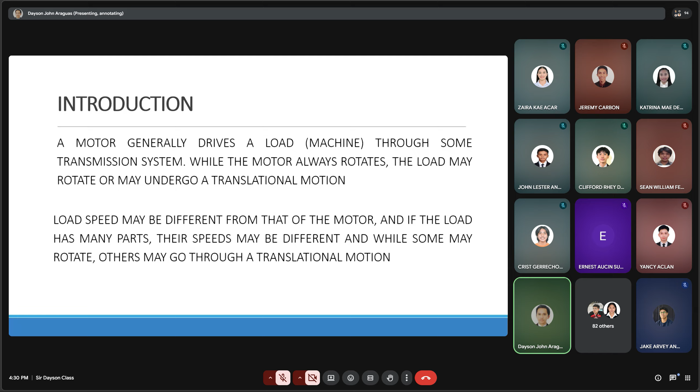Okay. Again, some loads rotate like fans or pumps, while some loads move in straight line like elevators and conveyors. So because of this, the speed of the motor and the speed of the load may be different. So hindi laging equal yung speed ng sa motor shaft at yung sa speed ng sa load.

So this is the representation of the motor load system by an equivalent rotational system. Okay. So we have a motor here, and we have torque of the motor, in clockwise. Also, we have instantaneous angular velocity of the motor shaft, clockwise also. So torque of the motor is clockwise, angular velocity is clockwise, and then for the torque of the load, usually opposite of the torque of the motor, which is counterclockwise.

So J is our polar moment of inertia of the motor load system. So the unit, you can just refer to the unit written in our material.

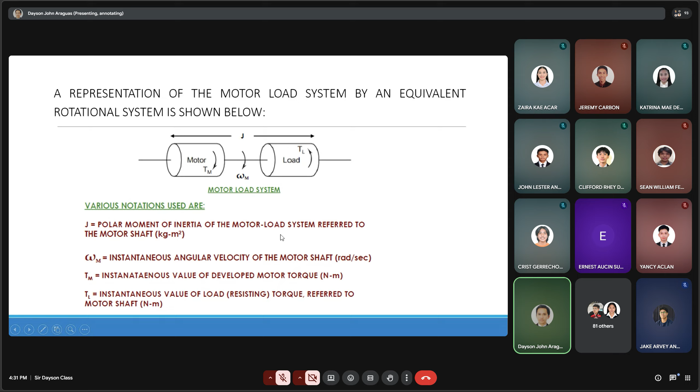So for the fundamental torque equations, the motor load system shown in the figure can be described by torque of the motor minus torque of the load, which is equal to the derivative of J times omega over time, or rate of change over time. Okay, which is also equal to J times d omega m over dt plus omega m times the derivative of J over time.

Okay. The equation above is applicable to variable inertia drives such as industrial robots. So for drives with constant inertia, dJ over dt is equal to 0. So usually, yung drives natin ay may constant inertia. So wala tayong rate of change with respect to inertia. So equal siya sa 0. So makakancel out yung ating part na to.

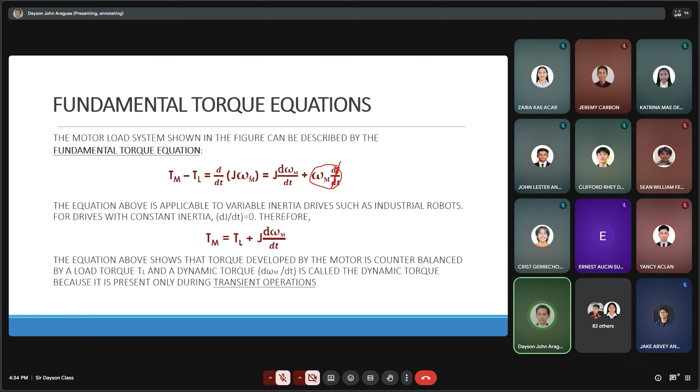So again, Tm is the motor torque. So this is the torque produced by the motor. TL is the torque load. So this is the torque required by the machine or the load. And J is the moment of inertia. So yung moment of inertia is siya nagre-represent how heavy or difficult it is to rotate the system. And omega m is the angular velocity of the motor shaft. So madalas tinatawag na lang din siyang speed. Ano?

So drive accelerates or decelerates depending whether the torque of the motor is greater than torque of the load. So during the acceleration, motor should supply not only the load torque but an additional torque component in order to overcome the drive inertia. In drives with large inertia, motor torque must exceed the load torque by a large amount in order to get adequate acceleration.

So if your motor torque is equal to your load torque, yes, you can maintain the drive system running. So pwedeng tumatakbo yung iyong system kung equal yung TM at saka TL. But from rest, pag equal yung torque ng motor at torque ng load, hindi mo mapapatakbo yung system or you cannot run the system when TM is equals to TL because of the inertia.

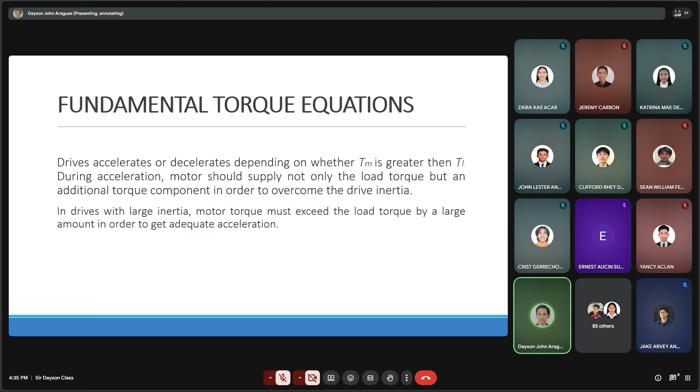So it is possible to determine the different state at which an electric drive causing rotational motion can remain. So the first state is if Tm is greater than TL, in which derivative of omega m over dt is greater than 0, so the drive will be accelerating. So again, pag mas mataas yung Tm sa TL, yung drive ninyo is accelerating or nagraran siya. Ano? Picking up speed to reach the rated speed.

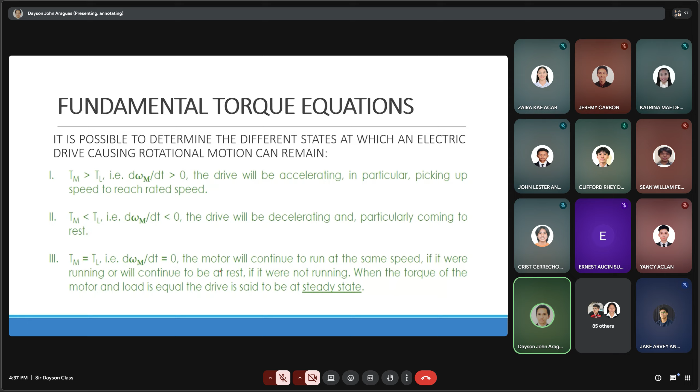So magme-maintain lang siya ng steady state. So kung tumatakbo, if it is running, and TM is equals to TL, it will continue to run at constant speed. But when it is at rest, it will continue to be at rest kahit pa may torque yung ating motor. So again, magme-maintain siya ng steady state.

So motor speed is considered positive when rotating in forward direction. So in loads involving up and down motion, the speed of motor which causes upward motion is considered forward motion. So for reversible drives, forward speed is chosen arbitrarily, then the rotation in opposite direction gives reverse speed which is assigned the negative sign. So arbitrary meaning the basis of random choice.

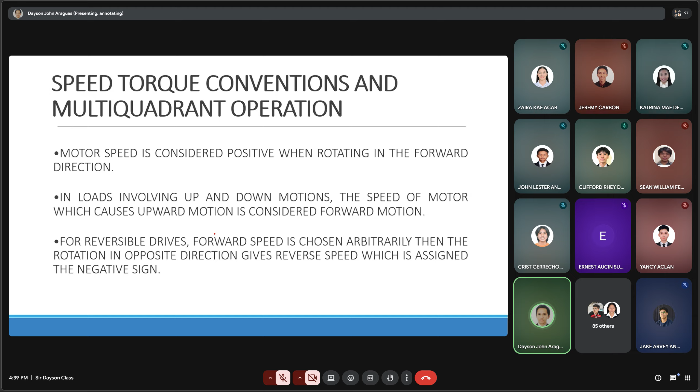So positive motor torque is defined as the torque which produces acceleration or positive rate of change of speed in forward direction. Positive load torque is opposite in direction to positive motor torque. Motor torque is considered negative if it produces deceleration. So positive load torque is opposite in direction to positive motor torque. This is from the figure that I have shown before.

Again, so the direction of the motor torque is always the opposite of the direction of the load torque.

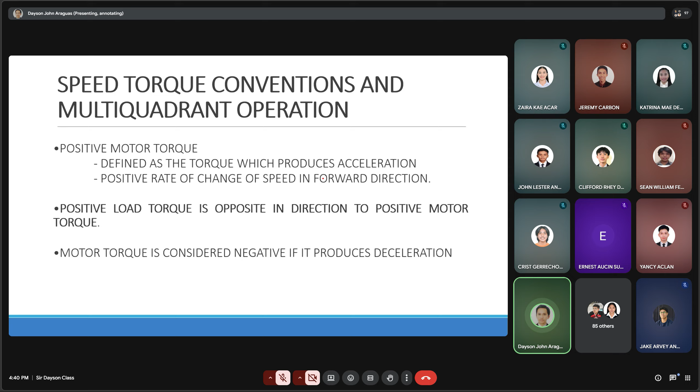So in electrical drives, forward rotation is considered positive and reverse rotation is considered negative. So in torque convention, positive motor torque produces acceleration in forward direction and negative motor torque produces deceleration. So usually load torque acts in the opposite direction of the motor torque.

So a motor operates in two modes: motoring, which converts electrical energy to mechanical energy, and braking, which works as a generator, converting mechanical energy to electrical energy. So it opposes the motion. So motoring supports the motion, braking opposes the motion. So a motor can provide motoring and braking operations for both forward and reverse action.

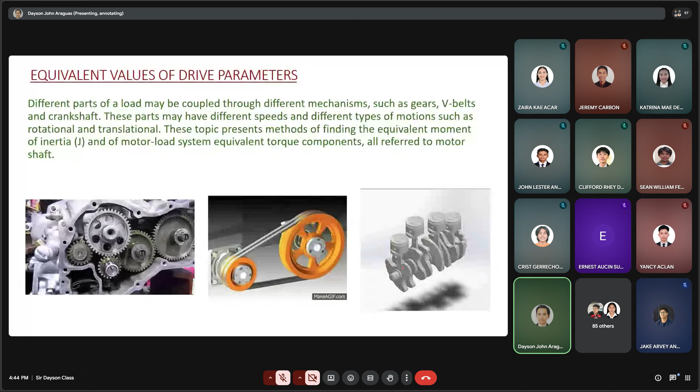Okay, let's focus first on load with rotational motion using gears. So consider a motor driving two loads, load 1 and load 2. So one is coupled directly to its shaft. So the motor has a shaft and the first load is directly connected to the motor shaft. And the other one through a gear.

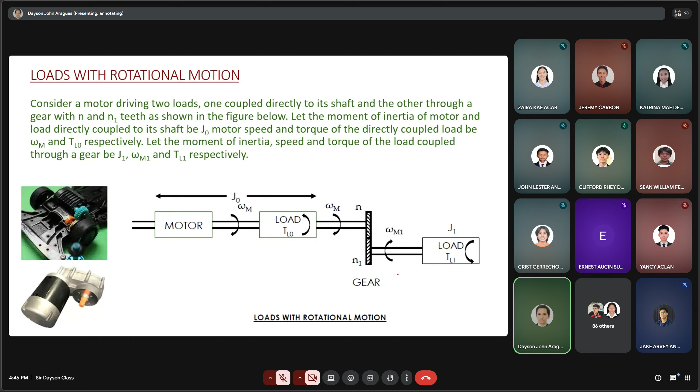Now let's consider that the ratio of our gear, or the gear teeth, is equal to A1, which is also equal to N divided by N1. So we will use this formula, which is also equivalent to omega M1 divided by omega M.

Wait, wait lang ha, may kumakausap lang sa akin. Wait lang.

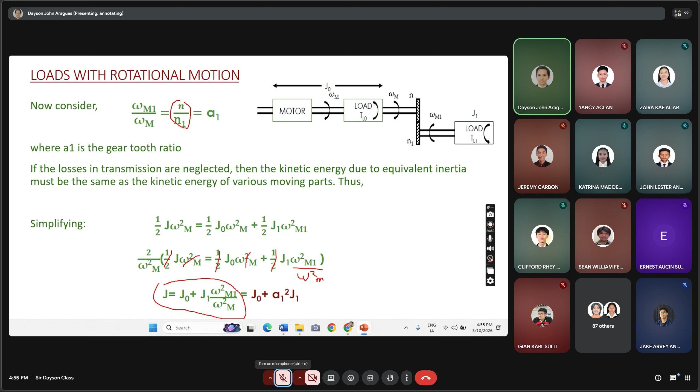Now, if you want to get the torque naman, we will first introduce the equation of power dito sa ating system. Okay, so power at the loads and motor must be the same. If transmission efficiency of the gear be eta, baka lang malito kayo, we have N and N1 para sa number of teeth. Pero yung eta, ganyan, mas mahaba siya. So eta hindi siya equal sa N. Eta is not equal to N. This is different. So if the transmission efficiency of the gear be eta, then ito yung ating gagamiting equation.

So torque load times omega m equals torque load naught times omega m plus torque ng load 1 times omega m1 over eta1. So bakit tayo may eta1? Because gumamit tayo ng gear, which is yung mechanical gear natin, meron siyang efficiency and hindi siya laging equal to 1 or hindi laging perfect yung efficiency pag gumagamit tayo ng gear. So nababawasan ang efficiency natin once connected na yung load natin through gears. Kaya meron tayong eta. So again, yung eta is yung efficiency ng ating gear. Okay.

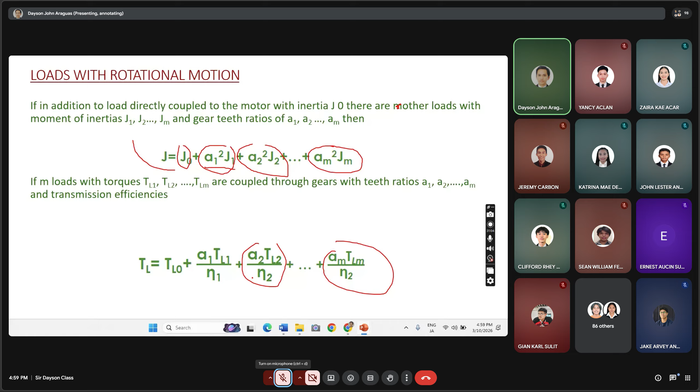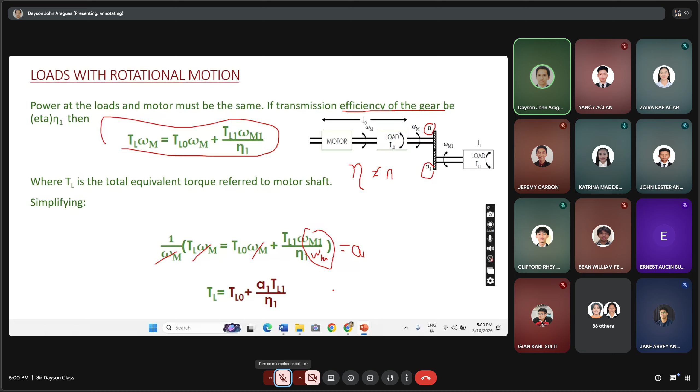So kanina focus tayo sa load with rotational motion. Now we will be focusing on load with translational motion. So instead na paikot, lateral naman yung kanyang movement. So again, pwede siyang up and down or pwede siyang left and right. Okay.

So consider a motor driving two loads, one coupled directly to the shaft. So same lang nung sa kanina. So we have motor and the first load is directly connected to the shaft, and the other through transmission system converting rotational motion to linear motion. So ito na yon. Example niya ay ito.

So let the moment of inertia of the motor and the load directly coupled be J naught or J0. Load torque directly coupled to motor be TL naught or TL0, and the mass, velocity, and force of load with translational motion be M1 in kg, V1 for our speed, and F1 or the force ng ating load. So dito tayo magde-derive ng ating equation.

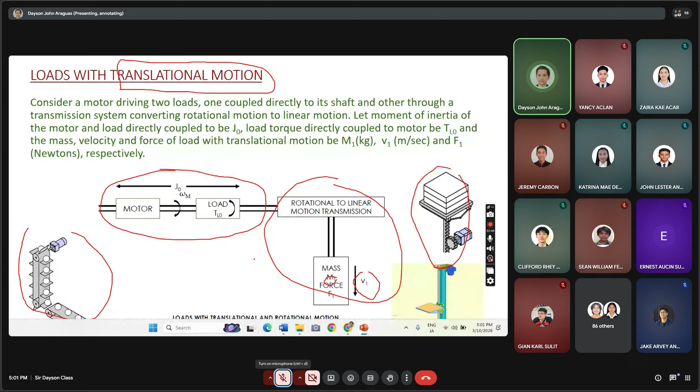Okay. So the kinetic equation of the system will be equal to 1/2 times J times omega m squared equals 1/2 times J naught omega m squared plus 1/2 M1 or the mass times V1 or velocity squared.

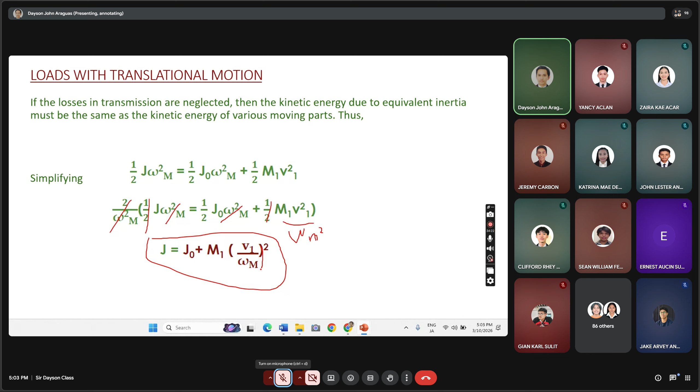Anyway, so same lang naman nung kanina. So kung gusto lang natin mag-focus sa equation ng inertia, i-cancel out lang natin yung iba. Yung 1/2 cancel natin at saka yung omega m squared. So makakancel natin ito, ito, ito, and ito. Matitira si omega m squared. And so ito naman yung kanyang simplified equation. So J equals J naught plus M1 times V1 over omega M squared. So kasama yan ha sa equation.

Now the equation of power dun sa ating system is equal to torque load times omega M, which is also equal to TL naught times omega M plus F1 times V1 over eta 1. So again, this is not N, this is eta. Where TL is the total equivalent torque referred to motor shaft.

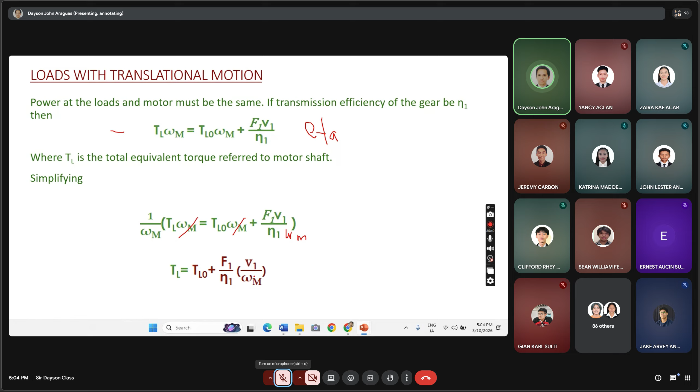So simplifying, because this is equation ng power, focus lang tayo sa torque, so i-cancel out lang natin si omega M. So makakancel to, and mamimaintain si omega M dito. So yung ating final equation, TL equals TL naught plus F1 over eta 1 times V1 over omega M. So same lang nung sa kanina sa rotational motion.

If additional connected load is madadagdag dito sa ating system, idadagdag lang din natin sa equation. So M1 para sa unang load na nadagdag, M2 para sa pangalawa, and so on. So wag lang kayong malilito, syempre mag-iiba-iba na yung ating value depende kung gaano karami yung nakakonect.

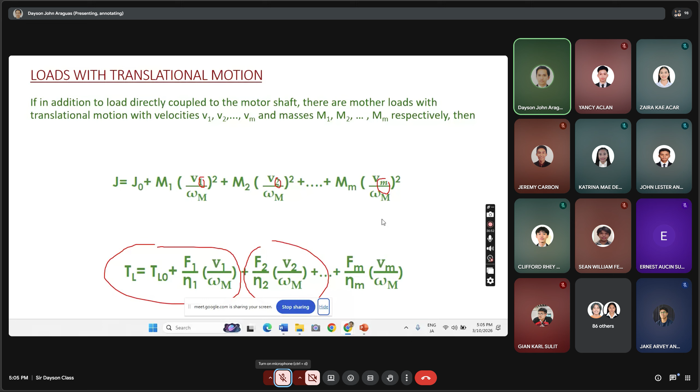And same with the torque, nag-start lang tayo dito, pero kung marami pang madadagdag ganito lang naman yung magiging formula hanggang sa kung hanggang ilan yung nag-connect sa kanya na equipment. Ayun, so yun lang naman. Actually, the focus to discuss in this meeting is equation lang.

Ayaw gumana ng escape at alt tab. Wait lang ha.

So may question ba kayo dun sa slide na present? So more on naging focus lang naman is ano yung mga formulas na gagamitin natin and paano siya na-derive. May question ba kayo doon?